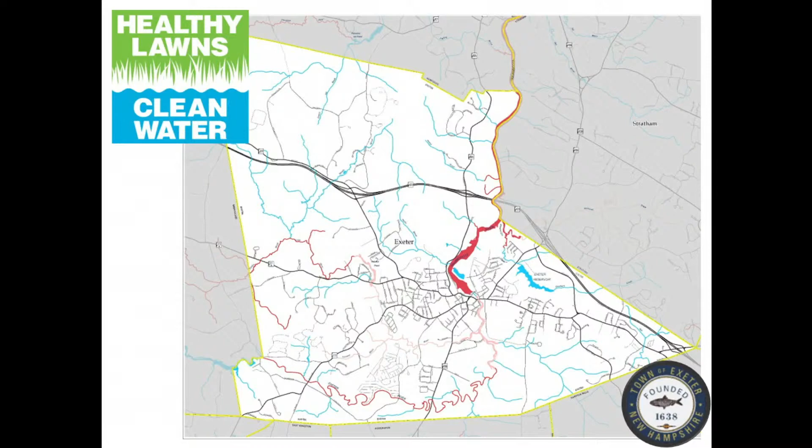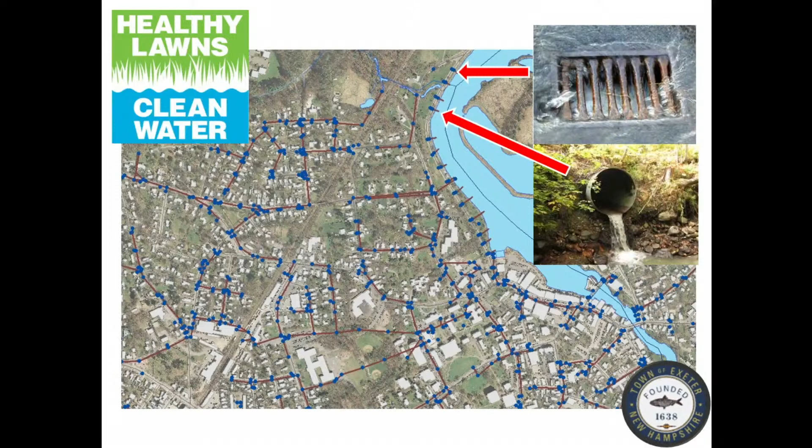So you can see that although this is from 2015, we do have a substantial issue in our town with water quality, and we take a variety of steps to address that. The other thing to note is it's kind of hard to find a spot in town that's developed that isn't close to a river or stream. And if you think back to the storm drain network, even though your house might not be right next to a stream or a wetland, you are connected to that stream or wetland through storm drains.

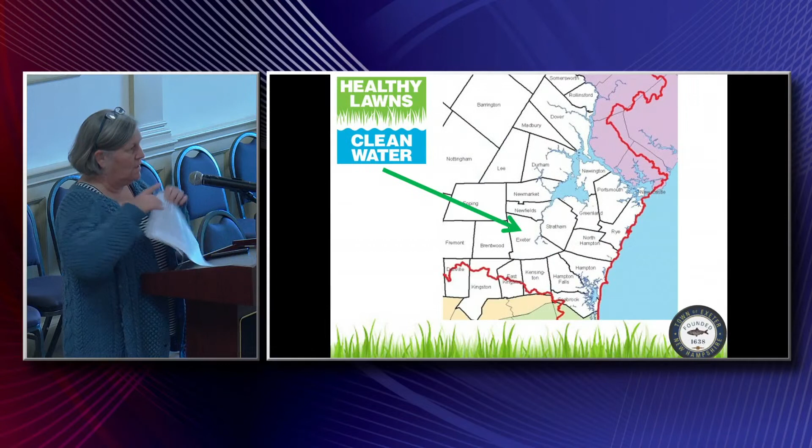Exeter is one of 52 towns within the Great Bay and Hampton Seabrook watershed. As a result, we talk a lot about the health of Great Bay. It comes up in topics quite a bit, because Great Bay is kind of the downstream recipient of all of our rivers and streams. They all flow through town, connecting to the Little River or the Exeter River out to the Squamscott, and then the Squamscott River ultimately connects to Great Bay.

So water quality of Great Bay is something that's monitored on a regular basis, and we can talk about that in a little bit. But we have 2 permits in Exeter through the EPA that we're going to focus on today. One is related to the wastewater treatment plant, and that's our total nitrogen control plan—we've talked about that in River Study Committee meetings in the past. The other is our MS4 permit, which addresses stormwater pollution in the core of Exeter's developed areas.

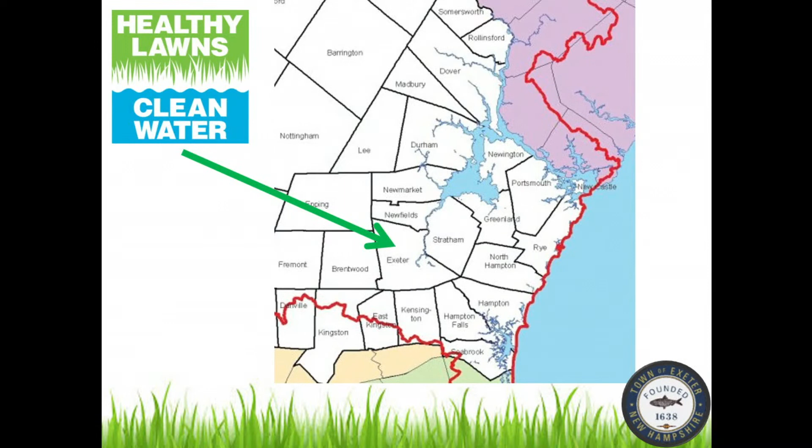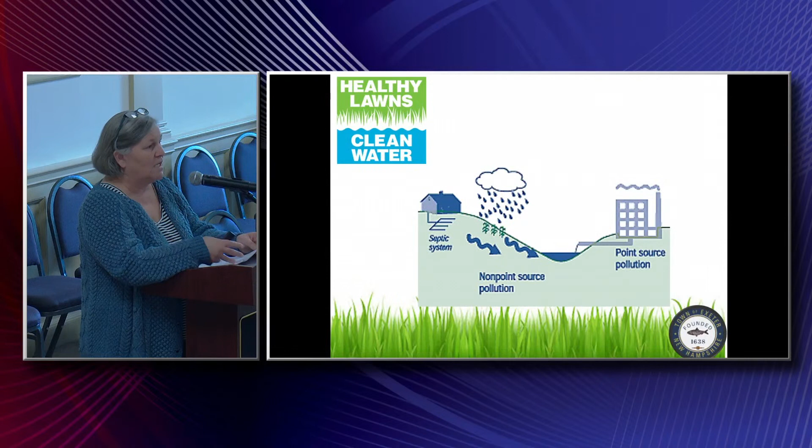There are generally 2 types of pollution talked about: non-point source and point source. Point source pollution, you can imagine like the wastewater treatment facility—there's a single pipe or a single location that you can point to as the source. Non-point source is different: it's more diffuse, multiple sources of pollution, not just one quick fix, more of a dispersed approach for treatment. Examples would be unmaintained septic systems, runoff from agricultural fields or athletic fields, runoff from your front yard, your lawn, your landscape, etc.—all of that making its way to the water bodies.

So hot off the presses, and I hope we can have an opportunity in the future to have an update from this report given locally, maybe—we might have a connection here locally that can help us encourage that. Trevor is with PREP, the Piscataqua Region Estuaries Partnership, and hot off the presses is their latest 2023 State of Our Estuaries report. This is kind of the culmination of all of the data points gathered when we're evaluating the health of Great Bay. It's a whole consortium of scientists, land managers, etc., that have come together and prepared data for this report.

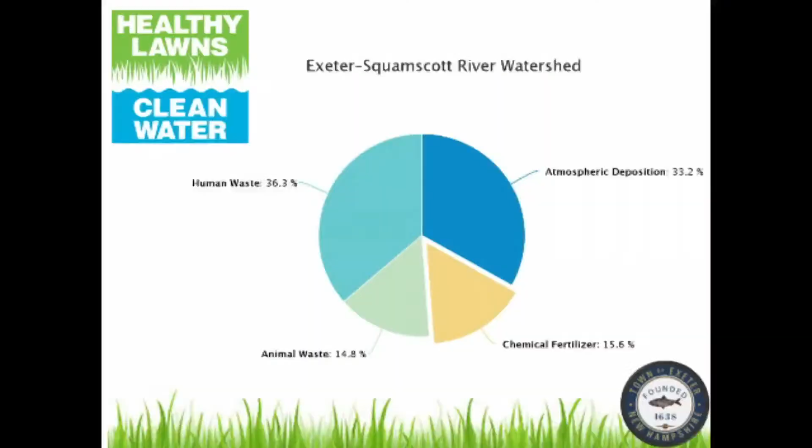Is this a chart of total load, or is this nitrogen? Nitrogen. Just nitrogen. So the atmospheric non-point deposition source is ammonia or nitrate, acid rain or basic rain as it occurs. Not much that we can currently do about that.

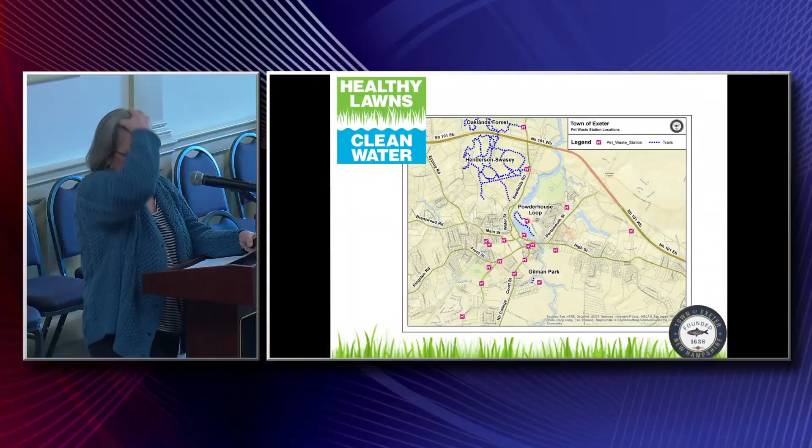In addition to catch basin cleaning and sweeping our streets, we also have a pretty widespread network of pet waste collection stations. This is one of the maps on our town website. As stormwater runoff passes along sidewalks, roads and grass, it picks up pollutants, including from pet waste. In the first quarter of this year alone, they've started to tally how much is being picked up, and it's astounding—1.3 tons of pet waste was picked up in the first quarter of the current year. So those pet waste stations are really an effective approach for reducing the amount of nitrogen.

Just recently, about a year and a half ago, we partnered with the Exeter-Squamscott Local Advisory Committee and sent out notices to all septic owners in the town of Exeter, giving them information about the importance of maintenance. So we're trying to get ahead of that human waste issue.

We also offer a free rain barrel program out of Public Works. For a donation to St. Vincent de Paul, you can get a free barrel. You buy the kit at RJ's, and then you have an opportunity to collect rainwater on your property.

You mentioned the septic—a traditional septic does very little for nitrogen. Is there a program to try to upgrade some of the septic tanks to handle the nitrogen better? I would say to be determined. I know that's some effort that's been tossed around as a concept, but it's not fully formed yet. But there is a goal to create some sort of incentive to upgrade septic systems.

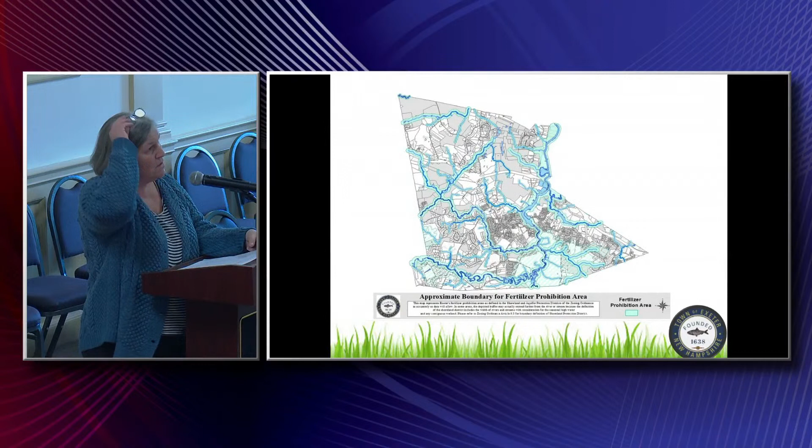So in 2016, 2017 timeframe, we passed a zoning ordinance that prohibits the use of fertilizer within the Exeter Shoreland District, so that requires entities to not apply fertilizer in those areas. We already had that same prohibition around our wetlands, and so that was one attempt we made to try to reduce the amount of fertilizer reaching rivers and streams.

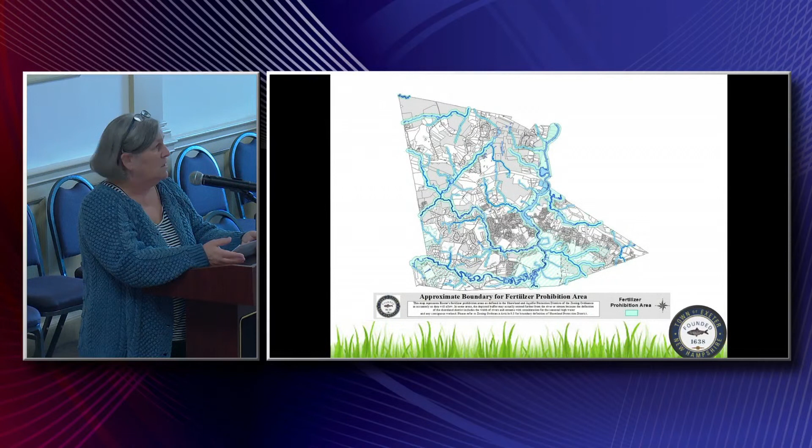Another one, through that program, we had an outreach effort where we provided a lawn care techniques demonstration. You learned how to calibrate a spreader, you learned how to read a bag of fertilizer, that sort of thing. We also had an event where we brought in individuals from landscaping companies and taught them about some of the regulations. Then the last one was we invited large turf owners in the town of Exeter to all get together and talk about what these new rules might be and guidance for compliance.

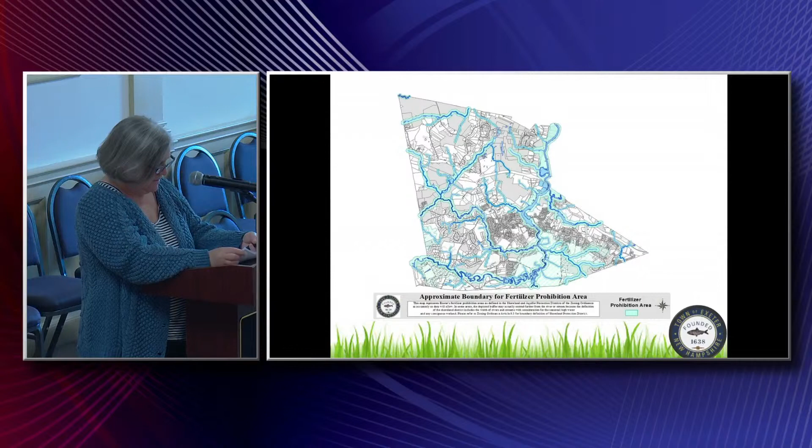And we had a consultant with us, Chip Osborne at the time, with Osborne Organics. All right, so this year we're working to expand the Healthy Lawns Clean Water program. That was the initiative that included the zoning ordinance and the outreach. That was the name of that effort.

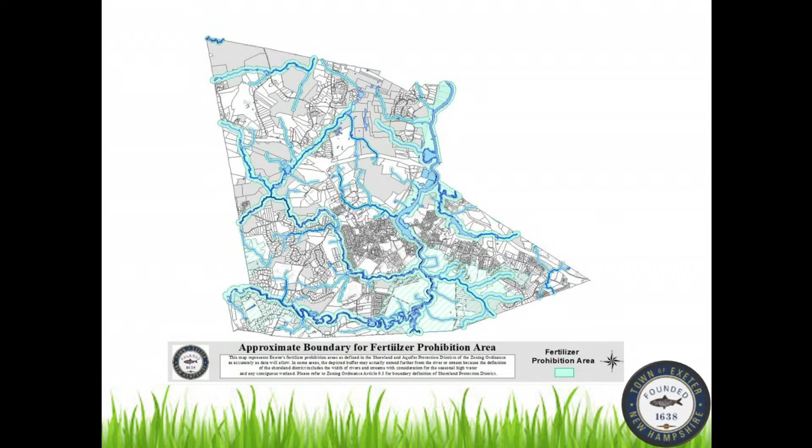That program is essentially in effect today, meaning we have a website, but there's really not some active promotion around it. We do have a Facebook page, and I'll post to that periodically. It's a pretty low number of subscribers, so it doesn't quite get the contacts that we want.

So we're kind of trying to bring all of this information back to the public to make sure the public's aware. We had a consultant prepare the brochure that you received just before I started talking, and it's a nice tool that we can leave on our counters. People here can grab it and learn some key information about fertilizer reduction.

It talks about how to read a fertilizer bag. It talks about the benefit of native plants. And most importantly, it highlights 5 simple steps that individuals can do on their properties to reduce the amount of chemical fertilizer that reaches our water bodies.

So part of that effort, we're launching a lawn care pledge, and I would invite each and every one of you who live in town to take a pledge to follow these 5 steps and reduce the amount of fertilizer. If you do, you'll get a nice yard sign that'll look like this. It's about 11 by 7, so it's not huge and obtrusive, but it would be a great way to entice your neighbors, kind of challenge your neighbors to join along.

Once we get the website up and running, you can in fact today scan that QR code and take the pledge, but we'll have more information associated with the website. So I thought I'd step really quickly through those different steps so that you get a sense for what those 5 steps will do and how they bring additional benefits.

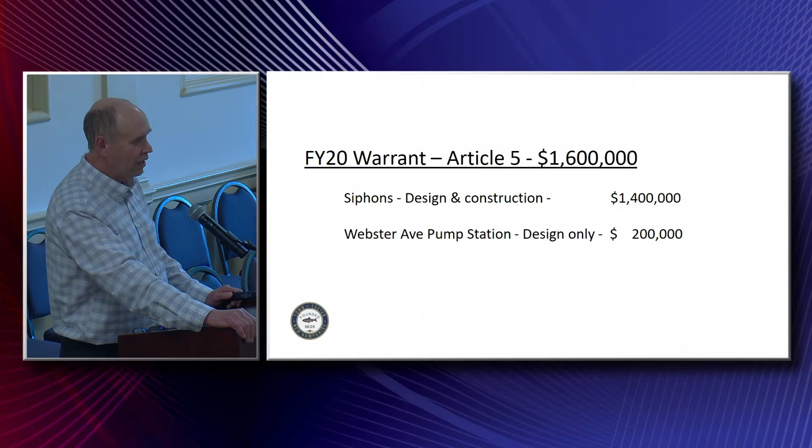All of Kevin, you're no stranger to that seat this year. Okay, so with that, let's see where we go. So back in 2020, we had a town warrant that was for the siphon project, and also at the same time, we were getting the Webster pump station off the ground too. And the dollar figure was 1.6.

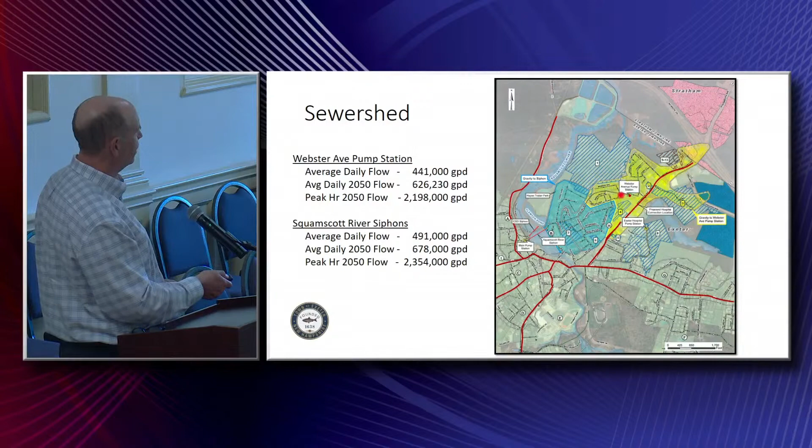And that was because we've got two sewer sheds in town that make up those. This blue area - well, let's talk about the yellow area - flows to the Webster pump station, which is right there. And then after it gets to the Webster pump station, it's pumped up and comes down through that red line right there, which is the existing siphon. And also what goes through the existing siphon is the blue area right here, which flows through the siphon area also.

So if we were going to need to do something to the Webster station, and it's at capacity now too, we would also, because the siphons were at capacity, need to upgrade the siphons first. So that's why the bulk of that money was for design and construction of an additional siphon barrel to add capacity to our system. And then what's going to show up later was the upgrade of the Webster pump station, which is under design now.

And the average flow going through the siphons today is about just under 500,000 gallons a day.

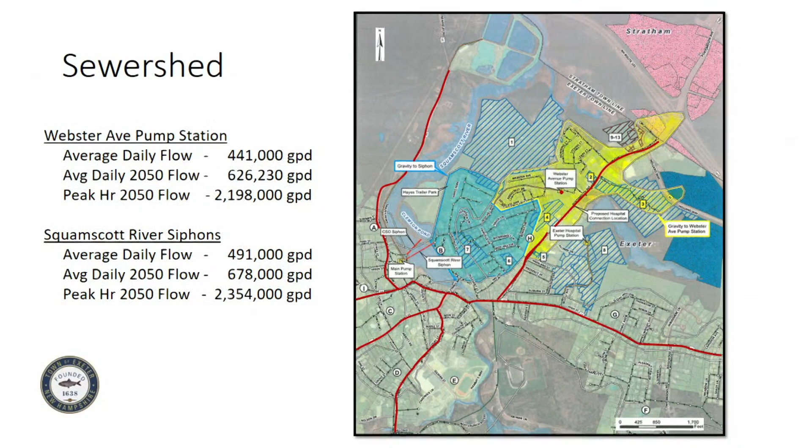So this is the picture of our existing sewer system in the Squamscott area near the siphon, and north is to the top of the page. We have the Squamscott River right down the center. On the right-hand side we've got Jady Hill Ave coming down and going behind the mill building, Clemson Lagoon here. On the other side of the river is Swasey Parkway, starting down at Water Street and heading north.

So the sewer flows come down, the bulk of them come down to this inlet structure here. There's also additional sewer flows from the back of the mill buildings that come across and tie in, goes through the siphon to this particular area, then comes across the river and goes into our main pumping station, which is then pumped all the way up to the TPW facility where the new wastewater treatment plant is housed.

Over on this side of the river, we've got a couple blue lines shown right about here, and those are sewer overflows, so that in times of rain, when we have additional flows from I&I infiltration and inflow getting into our sewer system, the capacity of the sewers could be inundated. So those blue relief pipes are there to take that additional capacity so that sewer is not flowing out of manholes into the road, takes it to this point, and there are two sewer siphons going this way under the river also to Clemson Lagoon.

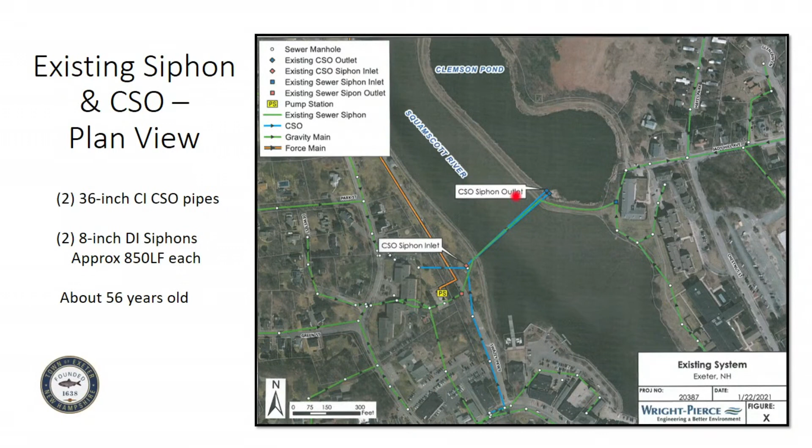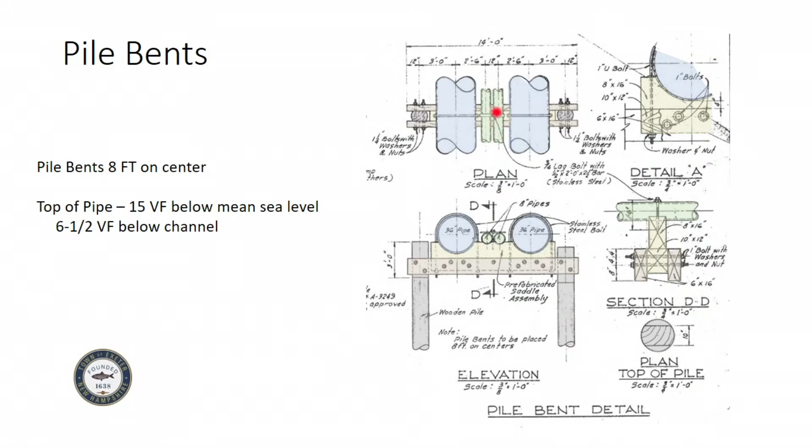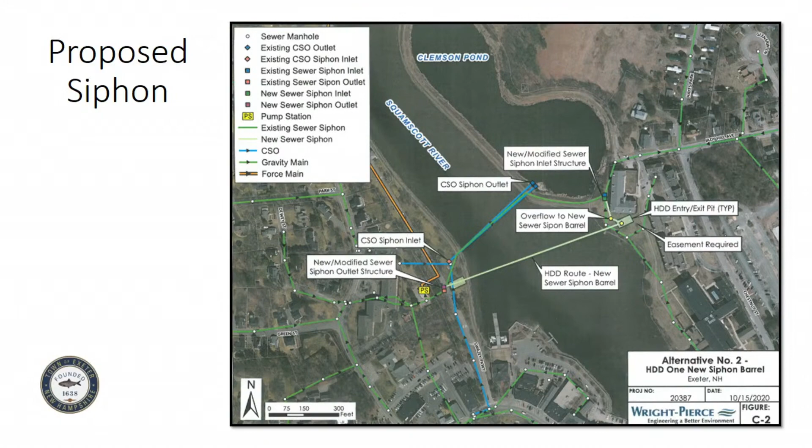As part of the design efforts then to add that additional siphon barrel, we had it in the scope for the consultant to get a contractor in to inspect our existing siphons and clean them one more time for us. Because we've got equipment that can clean things, but getting it this distance, we're challenged with it, so we thought it was a good idea to take a peek inside of those.

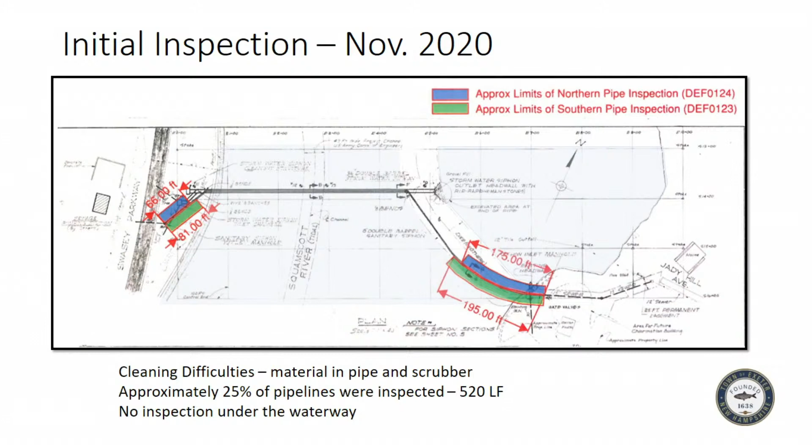And when we did, we had some difficulty doing that. There are, like I said, two siphon barrels, two 8-inch pipes. The north one is highlighted in blue for what we could inspect. The one in green is the southern siphon, and that's where we could actually get into the pipe with the inspections and find out the condition of those pipes. We kept running into more and more water, and we couldn't see through it.

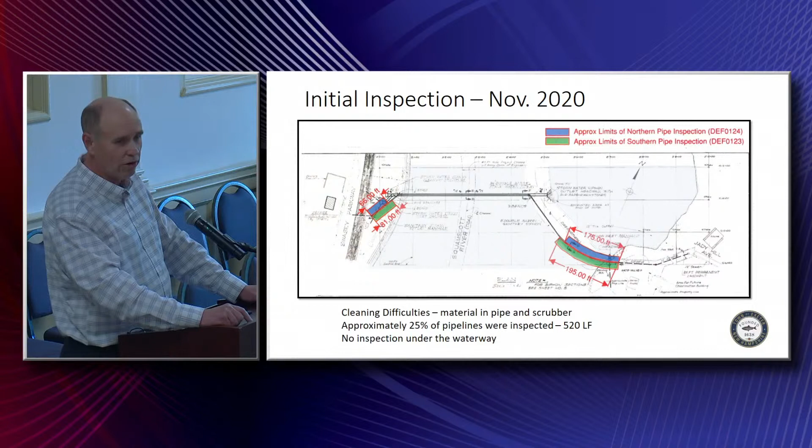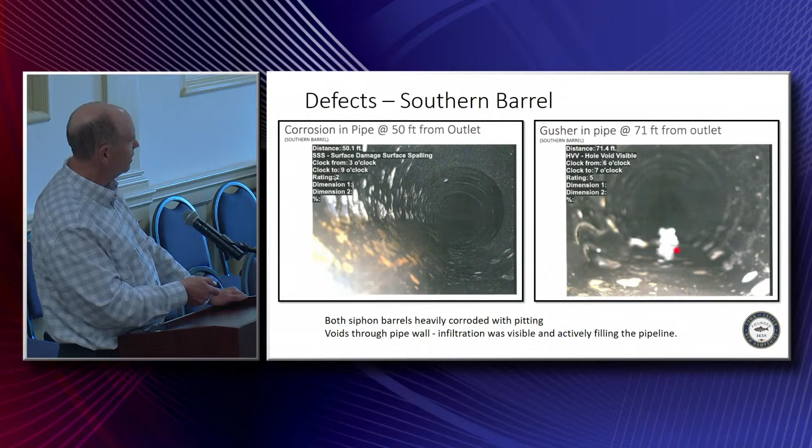Here's why. So in those two little areas that we saw, and what we were able to see, we took some pictures with the closed circuit TV, and you can see inside of the pipe, it's tilted a little bit - the flow should be on the bottom. You can see the pitting all on the inside of the pipe. Over here on this side, you can see the water on the bottom, so it's situated correctly, but that little white thing is water coming out of a hole in the bottom of the pipe and shooting up a little bit.

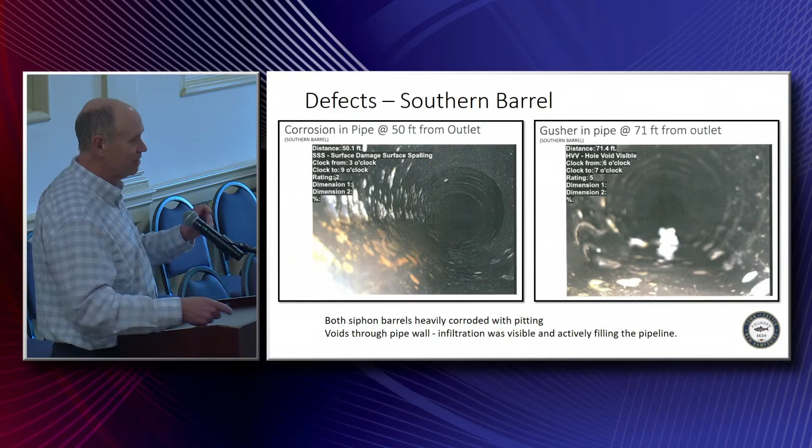So like, uh-oh, what do we do? This is unexpected. So we went and did an amendment to the contract to patch a couple of these holes up and come in again and try to do a better job of inspecting this thing.

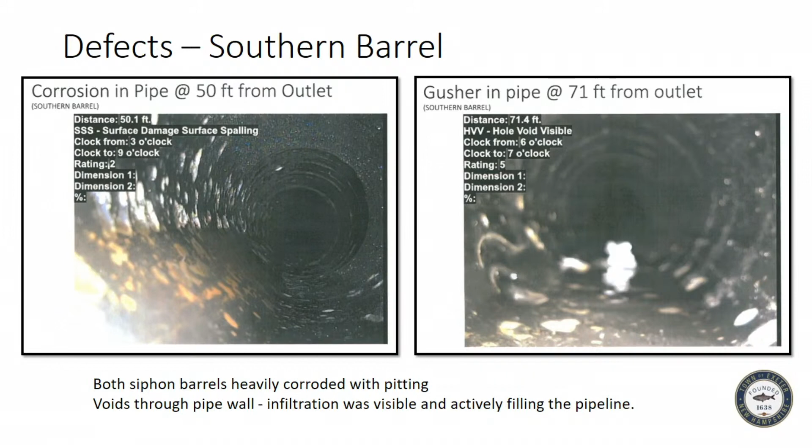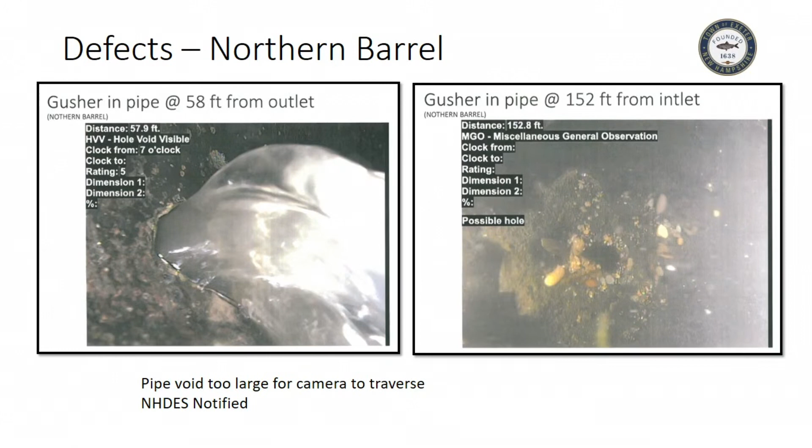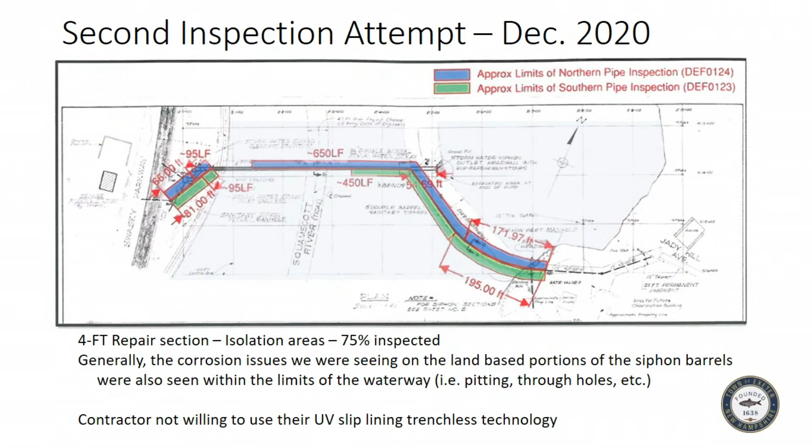We've got a project that we've got to make sure still keeps that side of the river whole, that the flows on that side can make it across over into this side.

So with that, the engineers went back to the drawing board, and they were able to design, or start the design of, a 3-barrel system now. That would be 2 10-inch pipes for normal flow, and then for those additional flows when you're at capacity, you'd have an overflow area that will work with the 12-inch. So it was really 3 pipes—it went from the existing 2 8-inch pipes to now 2 10-inch pipes and a 12-inch pipe.

And part of our requirements when applying for the Army Corps permit for this is that now we had to be at a depth of 16 feet below the river. So that's why it made a directional drill attractive, so that we could try to drill 3 pipes across the river.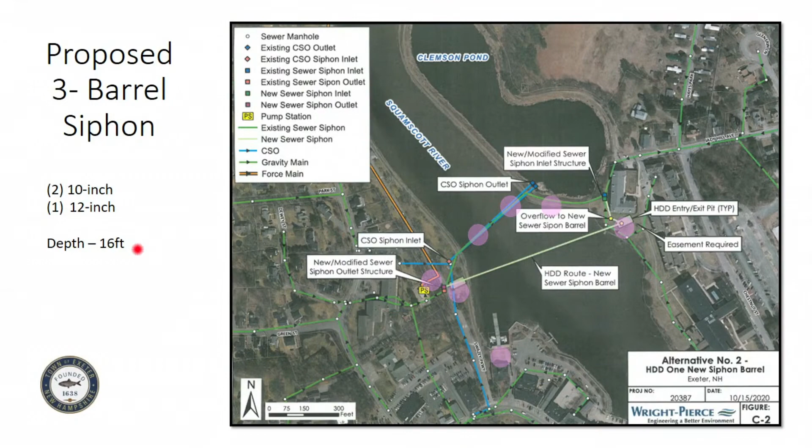So things take a while, and we're getting some estimates that we don't have monies for. So we had to come up with a contingency plan: if that siphon failed today, before we had a construction project fixing this thing, what would we do?

So let me get my bearings here for a second. This is Jady Hill Ave now, coming down to Clemson Pond. This is the dike that goes over, and this is the pathway of the existing siphon and then across the river. We would have to put in a pump-type system into a manhole there, and then be able to pump the flows.

From that manhole, along the mill property behind this particular building, up to their roadway entrance, across Stringbridge Road, and then to a manhole here in Water Street, where we were fortunate that we were already investigating sewer capacities in that area. So we had flow meters going on right before this project, so we knew what was flowing through there, and there's just enough capacity in those pipes to handle this flow on a short-term basis.

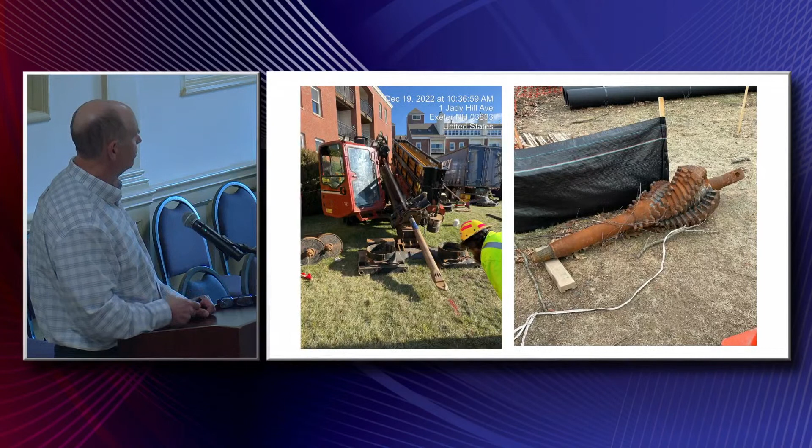So we had the contractor, Grenice and Sons, and his subcontractor is ECI from Vermont, their directional driller. The plan was to start on the mill side, drill across the river, daylight on the Swasey Parkway side, grab the piece of pipe and pull it on through.

So the first picture on the left is the drill rig, and we started out with this spoon-looking drill bit, because the data we had through those borings said a spoon-type bit would work. Forgive me for the non-technical terms, but I'm explaining this how I know it, and if we need more information, that's why Kevin is here.

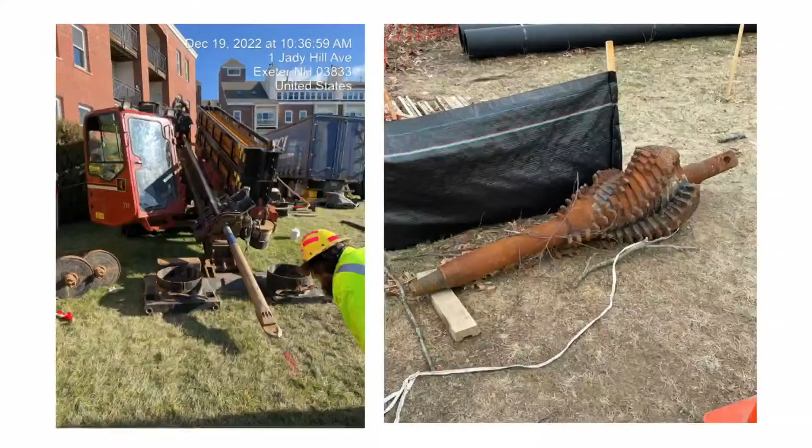That spoon bit is kind of cool because right behind it there's this aluminum-looking piece, and that had a gyro system in there so they could track where they are left and right under the river, and also vertical elevation. So embedded in that pipe is a very expensive little gizmo that was helping us understand where we are at any time with the drill bit.

Once they got across the river, they would put this other attachment on the right onto it, and that would enlarge the hole. It would be pulled this way through the hole. As it enlarged it, on the back side would be this polyethylene pipe that would be pulled through the hole. So the whole operation was going to be pretty slick, and I think within a week or so you could have had a pipe through.

But first attempt, they hit something at roughly 100 feet. They moved over, reset up again, and hit something about 100 feet, give or take a little bit. So that's what this yellow X is supposed to be designating, is what we now know is a ledge outcropping.

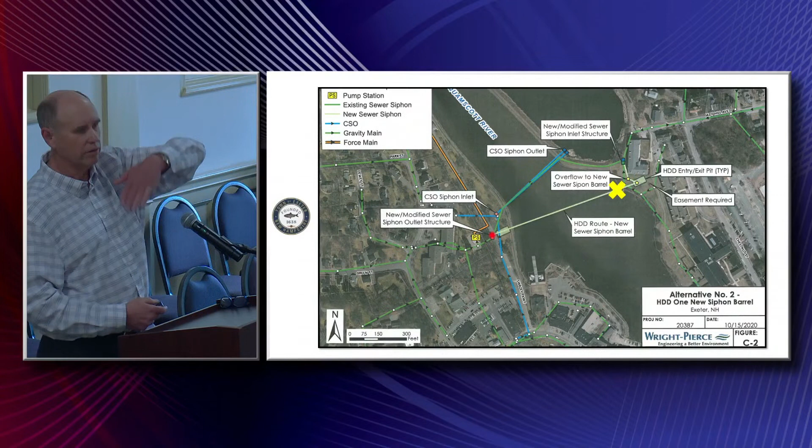The way the contractor did that, he got another drill rig, had to pause construction activities a little bit to get that, and now he started over on the Swasey Parkway side of everything. How these drills go is you're going at a pretty steep angle, and when you get to the elevation you're supposed to get to, you level out and go level for a while, then coming out you've got to bend it all back again. It's pretty technical, because eventually you've got to pull a polyethylene pipe that does have a little bit of give to it, but it can't be so sharp that you can't pull the pipe through.

So they get over and they start... let me see what I've got for the other slides first. I even forgot.

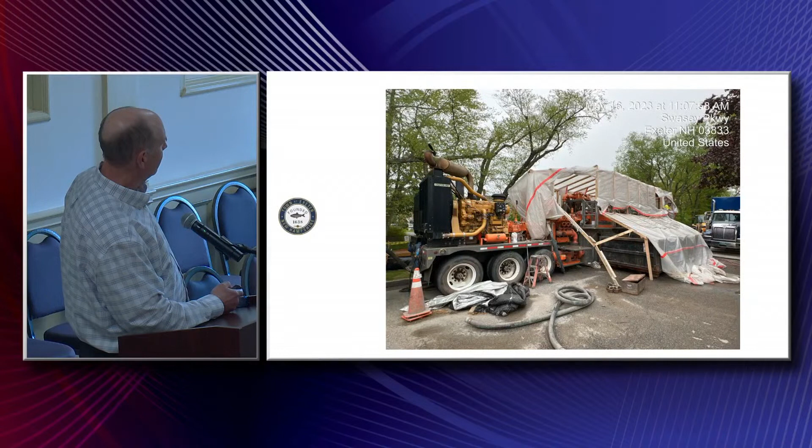This is another piece of machinery they have over there that you use to make mud, this bentonite slurry, which is a clay, and that helps lubricate the drill bit. But it also, once you're drilling, takes whatever you just drilled out and moves it back, and then you take the pieces out of it and keep recirculating the good fluid, but take out the bits you just drilled through. So this is what this machine is all about, it's the one that makes all the noise on Swasey Parkway.

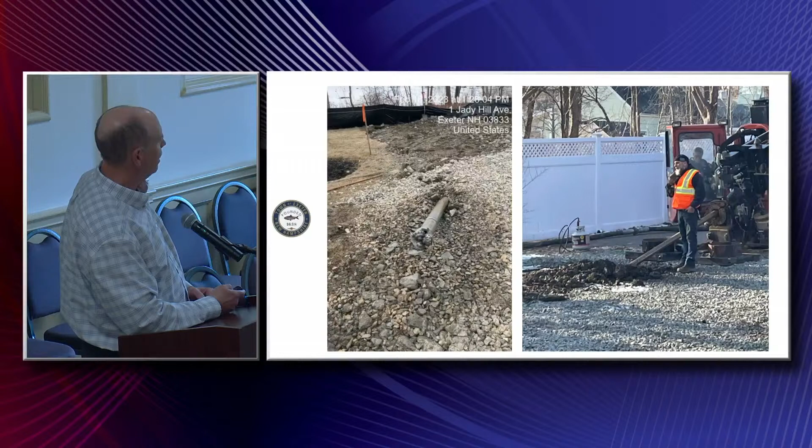So after several attempts, here's the drill rig over next to the main pump station on the Swasey Parkway side. This is the drill bit coming out on the mill side of the properties after making it 800 and some feet across the river. That was back in February, so finally we were making some progress.

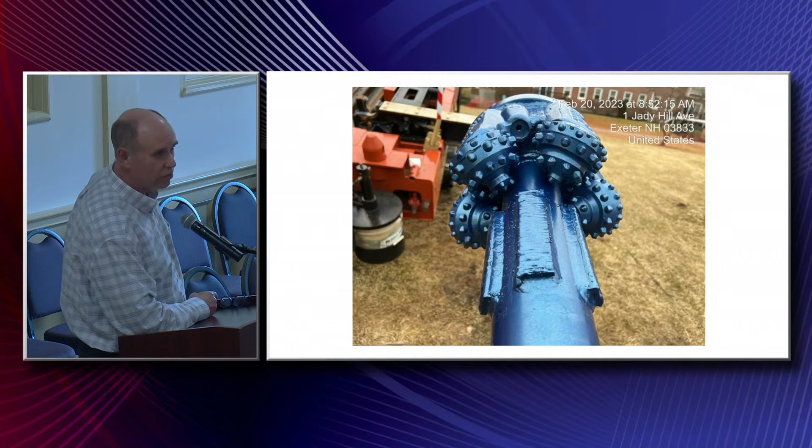Now, once you have a 6.5 inch diameter hole, comes your first pass with a reamer head, and this is a 12-inch reamer. What they do is pull this across the river, and it takes that 6.5 inch hole and makes it a 12-inch hole.

So the operation of this, you had this rig over here pulling the pipe, or pulling the head from over here. Remember now we've got a shaft that goes from one to the other. So as this pulls, the head goes into the hole from here and starts enlarging through the ledge.

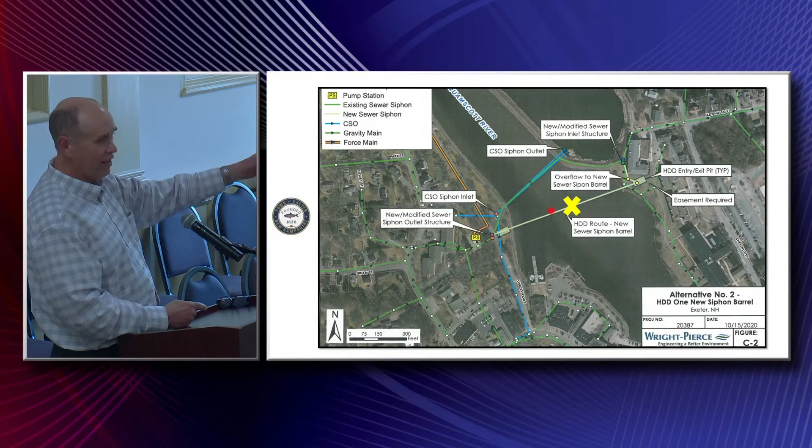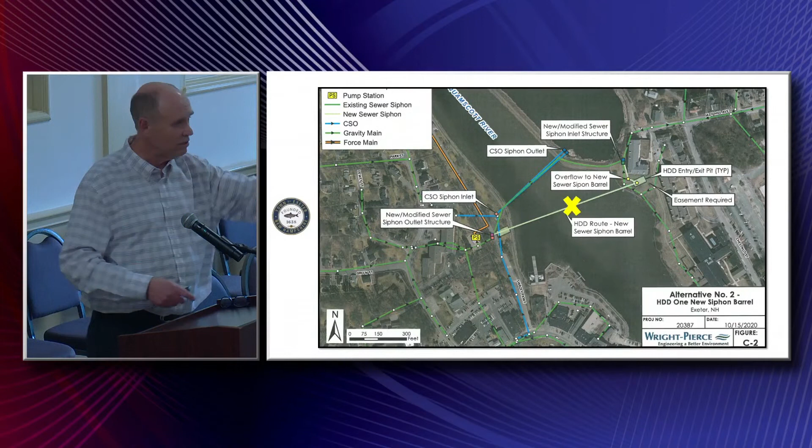I should have said this back with the picture of the 6 inch drill head. The idea was to go down to the elevation you wanted to get to, level out, and then come up. But because that head is different, it's heavier, and whatever it is where we're supposed to be turning is, forgive the layman's term, muckier, it wasn't able to make that bend and go at the elevation it needed to. Finally, it would hit the ledge early, so not only did we have to dig ledge over here, but now we were hitting ledge over here just because we couldn't get it to go across. So now you end up drilling ledge for most of the distance.

So that's the reamer head wasn't able to follow the same path as the 6 inch? I should have said this 2 slides ago when I was talking about the original drill head. Let me go backwards - when I was talking about that one, I couldn't level out soon enough to get that across. So we started drilling ledge earlier and had to drill it most of the way across the river. Got it, thanks. The reamer head was able to go through that hole.

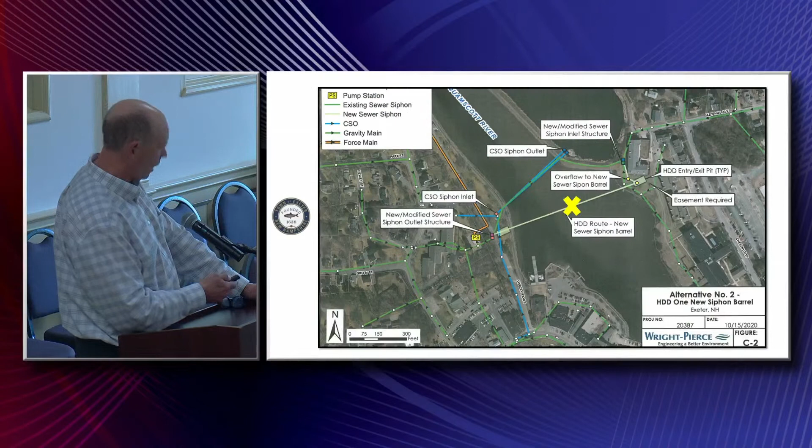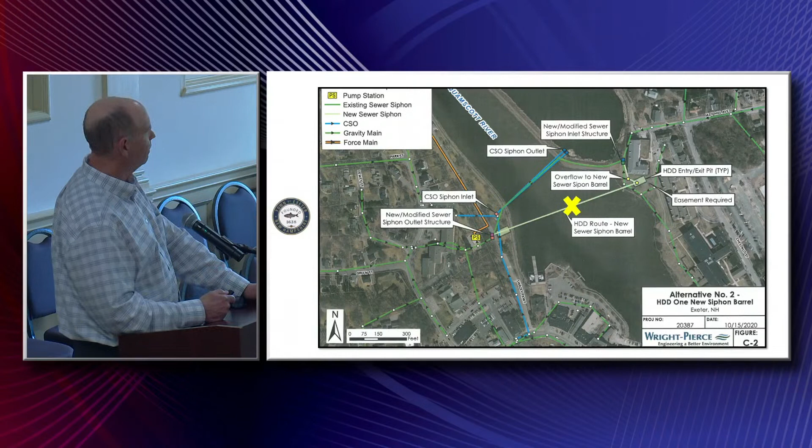But when it got to roughly this yellow X, the shaft broke. Now you don't have a connection between the two. That's too bad the shaft didn't break on the other side - we could have backed that thing out, but it can't pull through what's not rotating. So we paused construction, and it was a very challenging time period of what the heck are we going to do, who's responsible for this, and it got to be a little touch and go of what can we do.

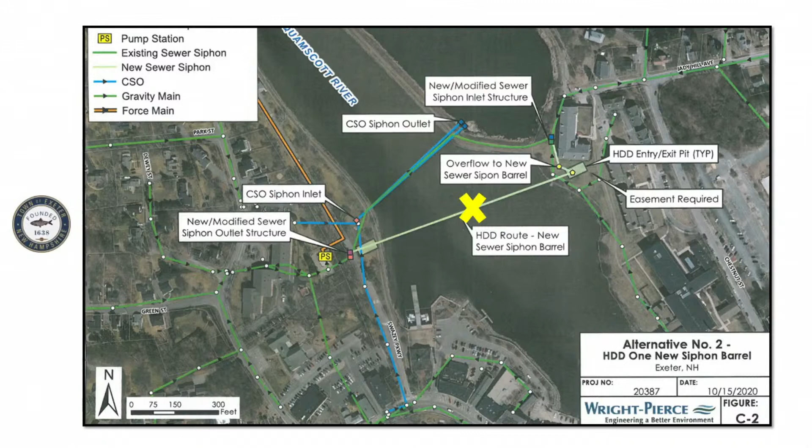So during that pause, we were trying to see how we could map the ledge profile - is there maybe a corridor we can do a pipe through that doesn't have this ledge situation we've got to worry about? So there was a hope that we could get this seismic machine, and the seismic machine is towed behind the boat right there. The idea was that they use this out west when they're trying to find water and oil, and that we'd be able to map the ledge in the whole area and find a corridor where we could put this pipe through.

The end result of that, we learned in the day that they were out there, there was too much air in the soil, and we got very little useful data, if almost none. So much for that other corridor idea.

But what was also being worked on behind the scenes is the design itself. New Hampshire DES regulations, if you're having a siphon project, they want 3 barrels now. Back in the day, it was only 2.

The consultants were able to devise a 2-barrel system that would work for both low and high flows, meaning 2 12-inch pipes. We'd have to be careful during low flow periods to make sure we have enough velocity in those siphons to move the effluent and keep settlement from happening. With the new pump station design, we can store flows and at night during low flows give it a little extra boost to get those cleansing velocities in the pipe. The consultants told that story to the regulatory folks, and we got approval for a 2-barrel system, both 12-inch diameter pipes.

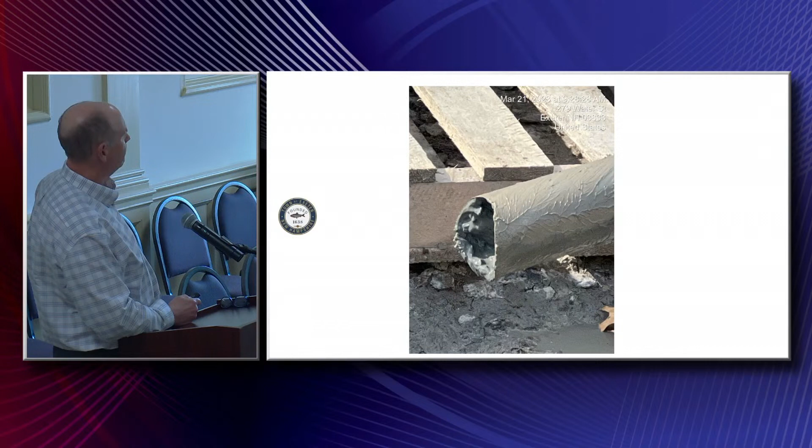Then, as we can see, that is the broken shaft. We got a lot of theories of why it was breaking, not that the contractor or subcontractor would agree with us, but just know there was a lot of talk and tension at this time.

With that, we are still worried about our 2 existing siphons failing. We don't have a game plan other than that contingency. So we worked out an agreement with the contractor: there's a lot of starts and stops, and we're paying every single moment you're out here, so give us a lump sum price to put this pipe in. The dollar figure was $2.6 million.

The select board approved that we can get $2.1 million from the sewer reserves and an additional $500,000 from town ARPA. So the work happening out there right now is being financed by that $2.6 million expenditure. Remember those are sitting there, the sewer reserves and town ARPA, because it'll come up in a couple more slides.

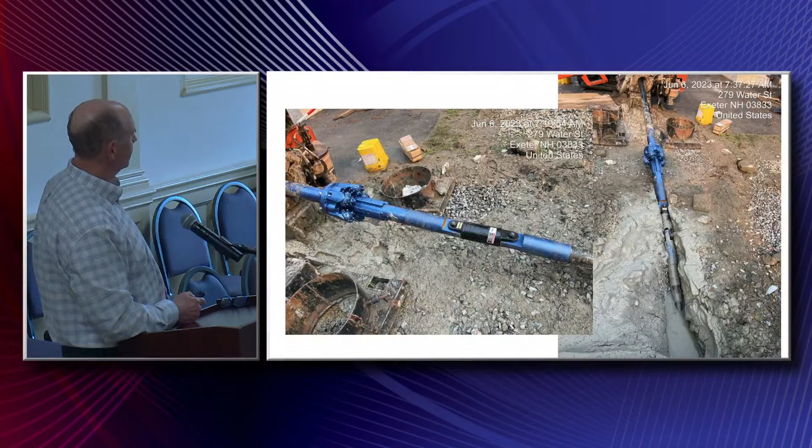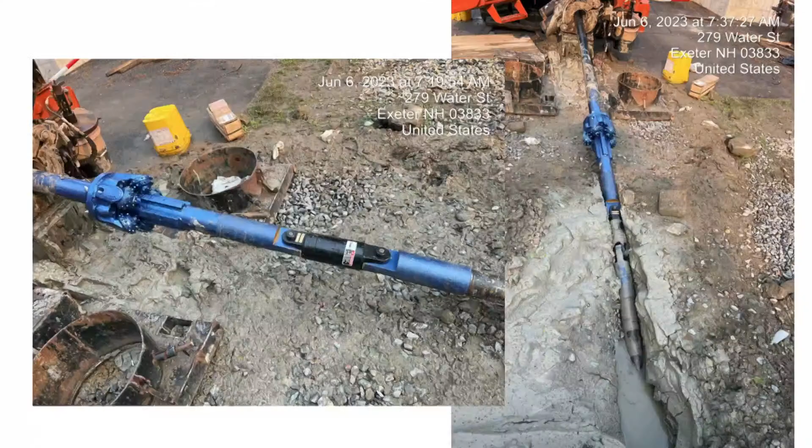So you already know what the drill head looks like. It wasn't the same one, it's a new one, but it looked like that brand new one in the picture. Here is a slide of the reamer that is now taking the pilot hole that was successful for the second time, through that additional $2.6 million effort.

And you have the drill rig right here. You've got the shaft that goes all the way across the river to the mill side. You've got this swivel right here - the only force is pulling on this, so you've got tension on that. This machine over here is doing the twisting, and this is what's interfacing with the rock. You can see some of that bentonite slurry, the light gray stuff, as they are going. This picture was taken today.

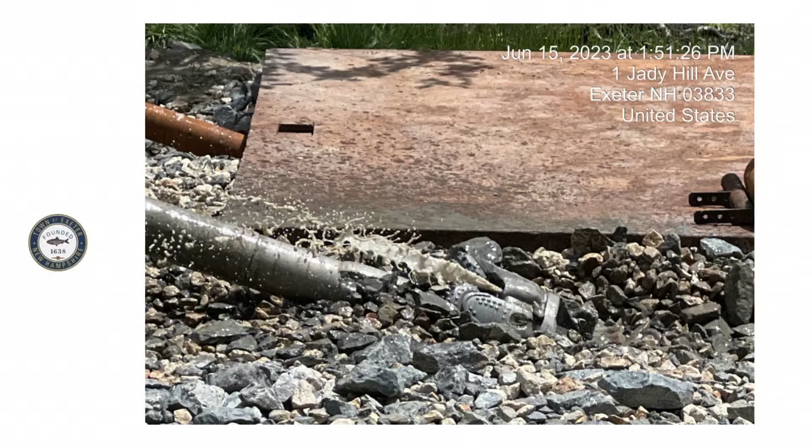Here is the mill side of the river with the reamer daylighting, so we've made it further than we have so far. Some of the activity coming up now is to take that head off, take it back over to the Swasey Parkway side, put a new head on an 18-inch reamer, and do the whole thing again. After that one's complete, they'll take that 18-inch reamer, go to the Swasey Parkway side, put it back on, and attach the pipe behind that. The reason it goes through again is in case some debris falls in that hole, the 18-inch reamer will take care of that and continue pulling the pipe across the river.

So that only leaves us with one pipe - we got to do another pipe. During the negotiations with the contractor, we already have a fixed price for the second barrel. We need to come up with additional funding of $2.3 million.

This is where I might need help on this. Is it okay to continue? Please. Okay.